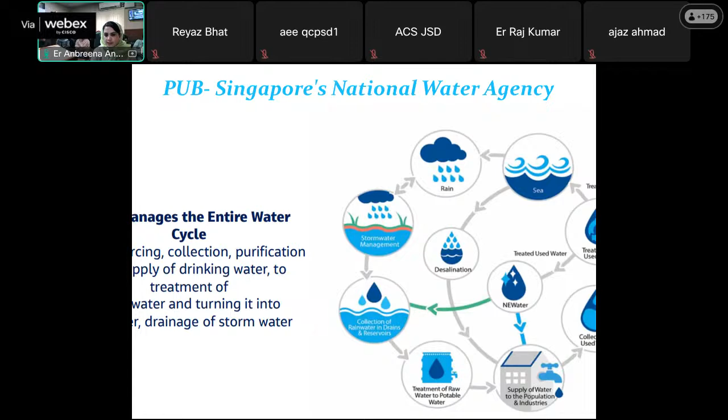Singapore's approach to water sustainability has been through hard work and coordinated efforts. They have managed to construct not only a robust but a diversified supply of water to meet the ever-increasing rising demands. Advanced planning, design, and construction of water supply systems, be it drainage, be it pipe jacking, micro tunneling, all the modern technologies are being adopted for any site or construction of water supply systems.

PPP framework projects have been introduced in Singapore in various water projects, wherein public and private partnership has been encouraged. The expertise of the private partners, along with financing and operational expertise, complemented with the responsibility of the public as a stakeholder, provides access to safe drinking water and wastewater management.

The distribution network loss of water is being managed very meticulously through accurate metering, proactive leak detection, and network management. The approach of Singapore is predictive rather than reactive, because they act in a manner so that they predict and apprehend any losses in the distribution, such that proactive measures are taken.

These losses are prevented. The legislation and rules in Singapore with regard to water supply are quite stringent. As much as $50,000 fine is charged to any person or contractor involved in damaging any water supply infrastructure or pipe damage, along with a jail term of 3 years. At present, a Singapore dollar is equal to 61 Indian rupees.

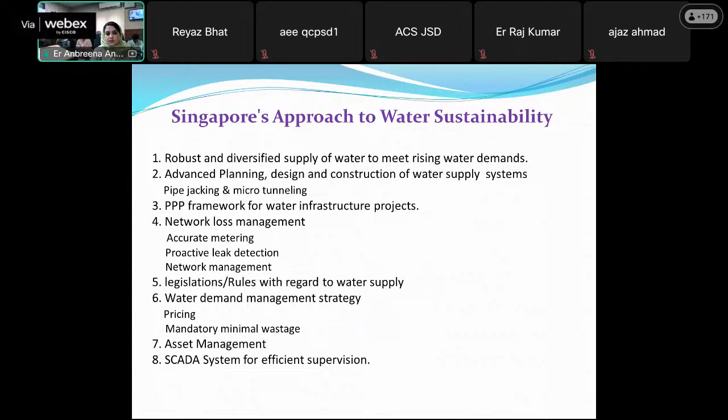Asset management is being done for all assets, whether it be water treatment plants, water reclamation plants, or pipe networks. Asset management is actively done, and a SCADA system is installed in every plant for efficient supervision.

Network distribution management is done through good planning and design, which involves sizing of pipes, location of valves, and alternate supplies. During construction, there is strict supervision, control, and workmanship. There is use of reliable pipe material, including PU coating, which is polyurethane coating, done on DI pipes for all replacement projects. Application of wrapping material is done for corrosion prevention, along with good quality, corrosion resistant connections.

Pipes are cement lined DI steel pipes, and mains greater than 700 mm diameter are cement lined steel pipes. Every precaution in planning, design, and construction phases is done meticulously to ensure minimal wastage of water and better efficiency.

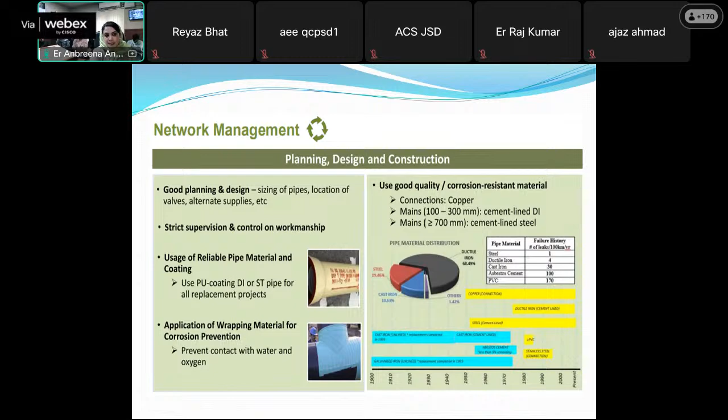There's a proactive leak detection mechanism in place for distribution mains less than 500 mm. Noise loggers, correlators, mobile phone sensors, and permanent leak detection sensors are there for monitoring any leakage on a daily basis.

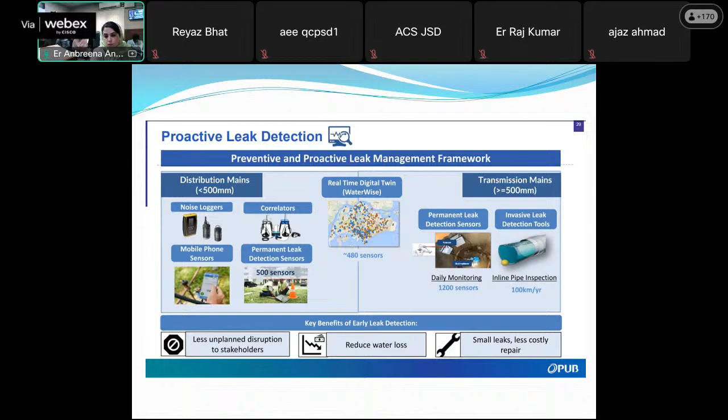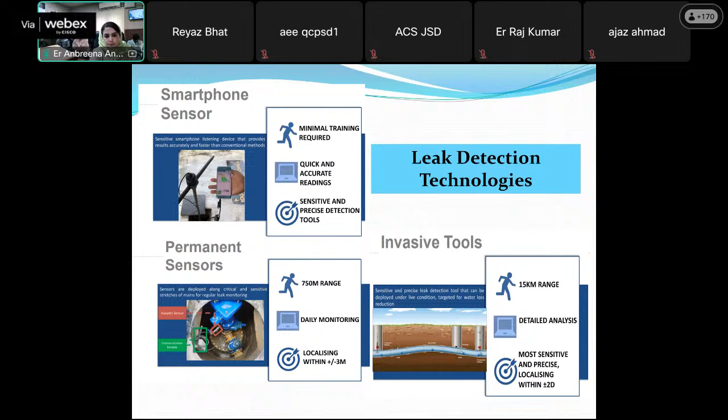Permanent sensors are installed in every transmission main. There are also invasive technologies where, under live conditions, a precise leak detection tool can be employed targeted for any water loss, with a range of 15 kilometers. Such are the active, proactive things being done.

This is the Johore River Water Works. The water is being imported from Malaysia, the adjacent country to Singapore. Singapore was part of Malaysia at one point of time, and at present Singapore still manages its water supply partly by importing water from Malaysia.

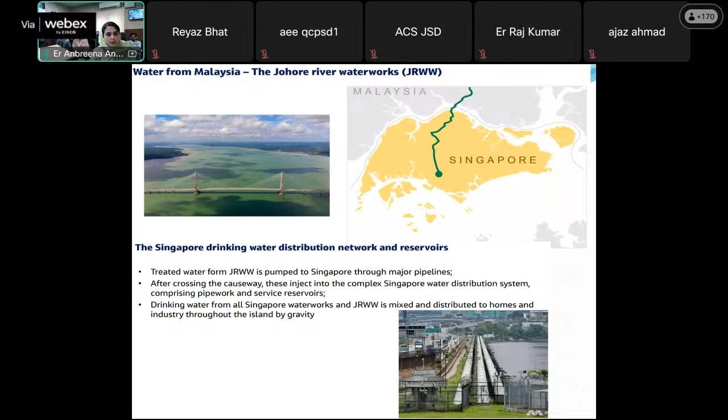The treated water from the Johore River Water Works is pumped to Singapore through major pipelines. These are injected into the complex Singapore water distribution system and distributed to homes and industry across the island by gravity. As seen in the pictures, the Johore River Water Works pipeline crosses the causeway and is then distributed inside the country.

Then we come to the NEWater production. In Singapore, the terminology has been altogether changed. In India, we call this water used water or reclaimed water, but in Singapore, they called it NEWater production, after this treated used water.

From this plant, which is called water reclamation plant in Singapore, it undergoes a series of advanced recycling techniques like microfiltration, ultrafiltration, and reverse osmosis. Then finally ultraviolet disinfection is done, and new water is produced, which is very good, safe, completely safe, and declared as per WHO standards. It is fit for potable drinking water.

People in Singapore have greatly adopted this new water, using it for every purpose. It has been marketed on a great scale, because of motivation and public awareness programs, and people have greatly adapted it.

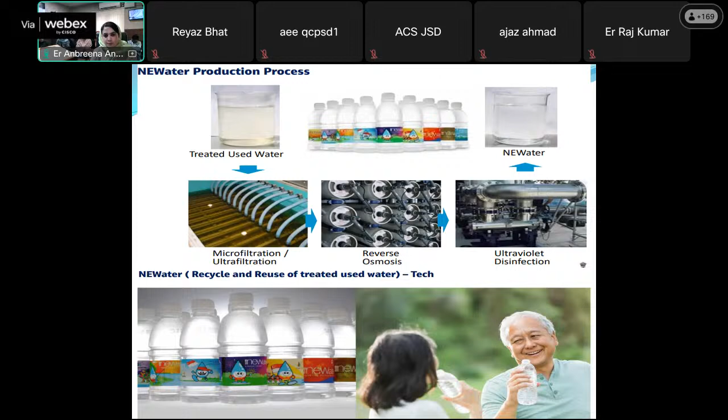These are the series of processes which this used water undergoes, after being treated from any sewage treatment plant, called water reclamation plant in Singapore. After primary and secondary treatment, this used water undergoes microfiltration, wherein it is passed through a 0.2 micron filter and suspended solids are filtered out. This water is conducted through hollow fibers, and any impurity up to 0.2 microns gets attached to these fibers.

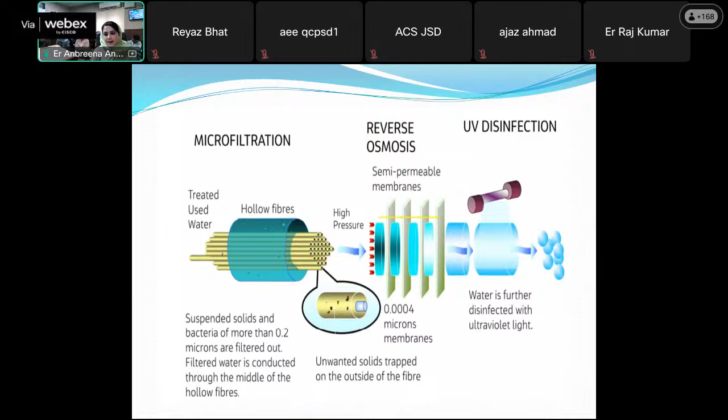Then it is subjected to reverse osmosis, wherein under high pressure, this water is passed through semi-permeable membranes, and particles as small as 0.0004 microns are removed and trapped in these membranes. Finally, the water undergoes UV disinfection through UV light, and it becomes fit for drinking purposes.

In Singapore, land is a constraint, as the country is very small with a total area of 734 square kilometers. The treatment technology becomes a difficult decision to choose because land is a constraint - you cannot construct large treatment plants and large reservoirs everywhere.

So a process strategy has been developed wherein the process is selected after undergoing various checks, like the capacity of the plant is one parameter, and the second is the availability of land. If capacity of the plant is greater than 50 MLD and land is available, then you can go for conventional treatment through primary clarification, secondary conventional biological nutrient removal, then biosolid treatment, and finally deammonification.

But if capacity of the plant is greater than 50 MLD and land is not available for construction, then you adopt process number 2. Here, we replace conventional secondary treatment with MBR technology provided with IFAS, integrated fixed film activated sludge technology, which reduces the space because secondary clarification is done in a single tank only, so sludge generation takes place quickly, and we don't require huge clarifiers for sludge digestion.

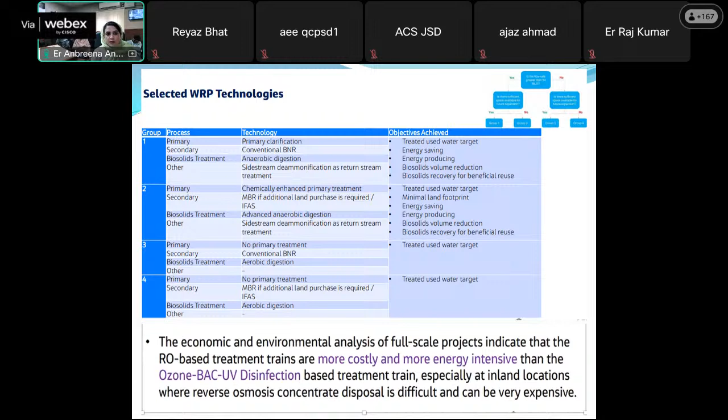For advanced recycle technology, where water is converted into potable water, it has been found that RO-based treatment trains are more costly and more energy intensive compared to ozone bioactivated carbon UV disinfection, especially at inland locations where reverse osmosis concentrate disposal is difficult and can be very expensive. This is how selection of technologies is done.

This schematic diagram shows the 4 treatment processes as discussed. In group 1, we have conventional technology used in sewage treatment or water reclamation, followed by advanced recycling water treatment. In group 2, where there is land constraint and capacity greater than 50 MLD, we use bioreactors with MBR technology, followed by the same advanced recycled water treatment plant. Then treatment processes 3 and 4, where after primary, secondary, and tertiary treatment, the recycled water is produced.

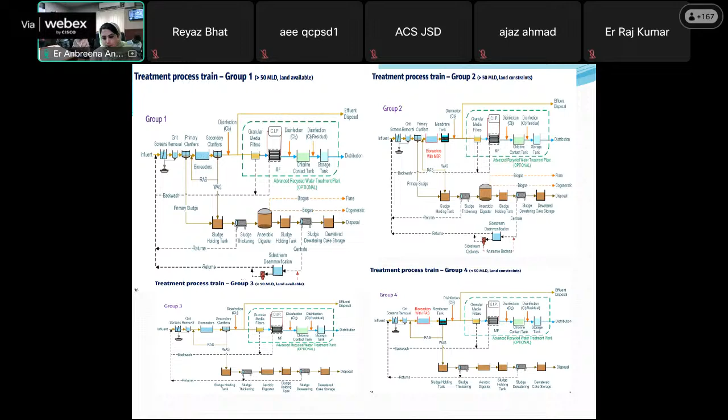This is an overview of the construction of conveyance systems, any wastewater treatment pipeline or any water system pipeline transmission mains.

Trenchless technologies like pipe jacking or micro tunneling are being adopted against open cut excavation, because in Singapore land is a constraint and not much working space is available for these constructions. These technologies are typically faster, but higher in cost, with less disturbance and less carbon footprint on the environment since less space is required. However, the ground condition may require stability, which is achieved through certain grouting techniques, and there are many others as well.

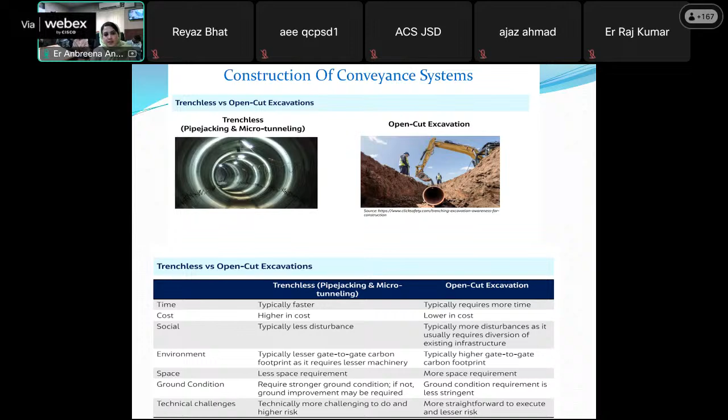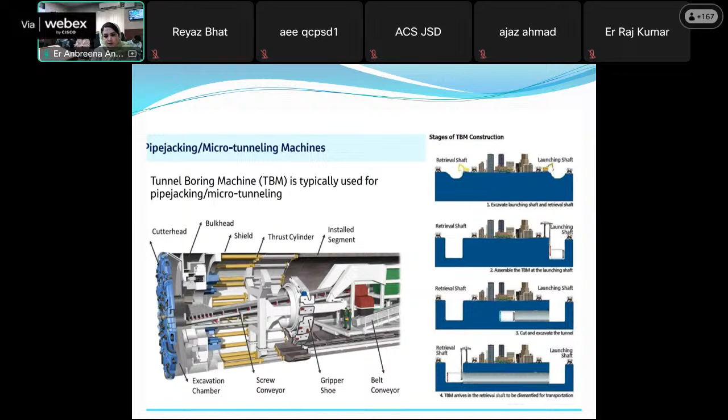This is a typical pipe jacking or tunnel boring machine, used for pipe jacking or micro tunneling. The stages are: wherever there is a construction site, you construct a launching shaft and a retrieval shaft. The TBM is transported to the site in disassembled form, assembled at the site itself, and launched inside the launching shaft. Then excavation of the tunnel is done, and the TBM is retrieved at the retrieval shaft and transported back.

This is the drainage scenario of Singapore. As I already said, Singapore receives a rainfall of more than 2200 mm per year, which is double that of London. So Singapore operates separate systems for drainage as well as sewers, and rain is conveyed to the sea to prevent flooding, as Singapore has various space constraints.

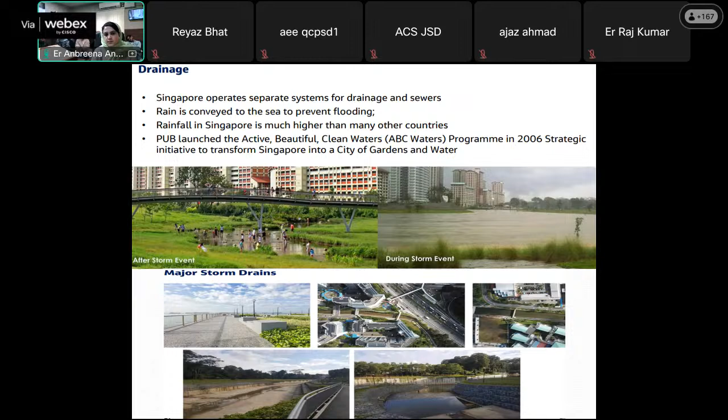From the pictures, we can see that major stormwater infrastructure has been constructed in Singapore, and certain flood detention buffers have also been built. During a storm event, this area acts as a buffer, and once the storm event is over, the same area acts as a beautiful garden or green space with water, where people can go for recreational activities. So PUB, the single water agency in Singapore, launched the Active Beautiful Clean Waters program in 2006, with an initiative to transform Singapore into a city of gardens and water.

This was the problem with the construction of a sewerage system in the past, because land is a constraint in Singapore. To eliminate any excessive land usage, the deep tunnel sewerage system concept was developed. This helped eliminate the need for any intermediate pumping stations in between, and the whole of the sewage or stormwater drainage could be transferred through gravity into a single compact water reclamation plant, where it was either treated or the effluent was simply disposed of into the seawater.

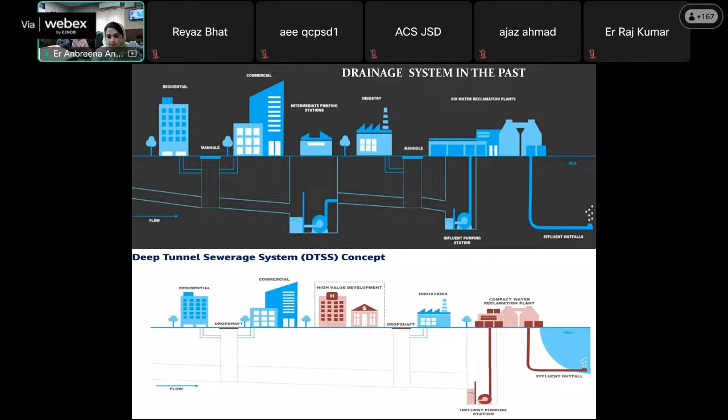Now in India, looking at the water recycle status in 2021, the total volume of used water generated by households in India was around 72,368 MLD. Out of this, the estimated infrastructure capacity for treating used water in India is only around 31,841 MLD. As per the inventory of the Central Pollution Control Board, only a small portion of treated used water is being reused in India.

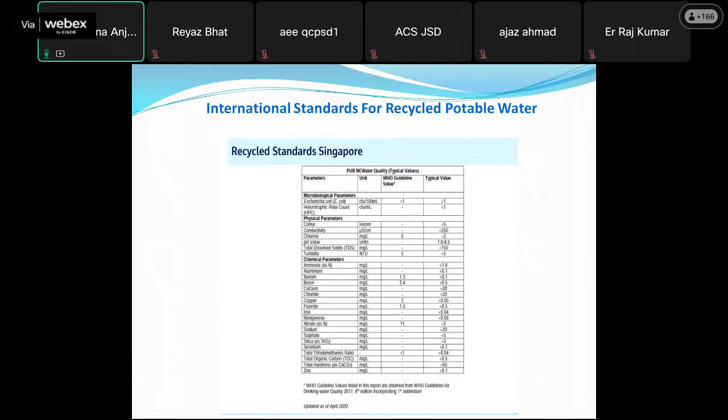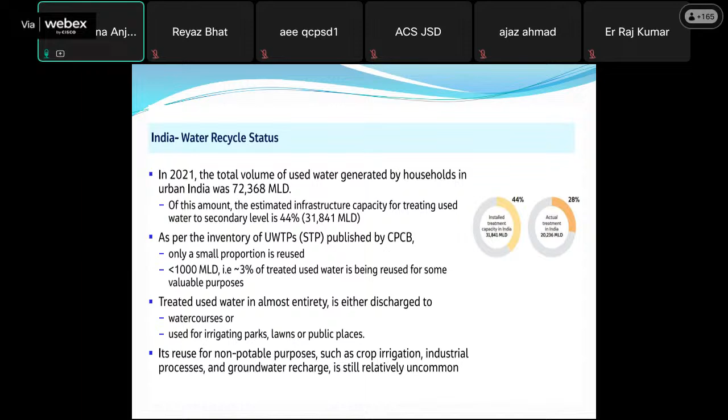That is less than 1,000 mLDs, or 3% of the treated used water being reused for any valuable purpose. This treated water is almost entirely discharged into water courses, irrigation parks, lawns, or public places. It is reused for non-potable purposes such as crop irrigation and industrial processes, but such reuse is still relatively uncommon.

Globally, India is ranked as the 13th most water-stressed country. Water scarcity necessitates diversification to alternative water supplies. After Qatar, Israel, Lebanon, Iran, Jordan, Libya, Kuwait - all Gulf countries - Saudi Arabia and UAE, India ranks at number 13.

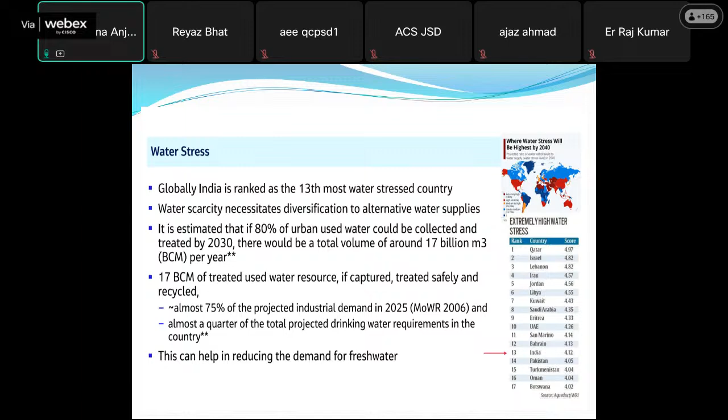It is estimated that if 80% of the urban used water could be collected and treated by 2030, there will be a total volume of 17 billion cubic meters per year. Out of this 17 billion cubic meters, if captured and treated safely, almost 75% of the projected industrial demand can be met, and almost a quarter of the total projected drinking water requirements in the country can be met, helping reduce the demand for fresh water.

These are certain central laws and policies governing water sanitation and used water in India. The Water (Prevention and Control of Pollution) Act was enacted in 1974 to maintain and restore the wholesomeness of aquatic resources.

Then the Ganga Action Plan was launched in 1986, followed by the Environment Protection Act of 1986, which is umbrella legislation designed to provide a framework for central and state government coordination. This act applies in principle to every establishment, agency, or individual discharging any pollutant into the environment.

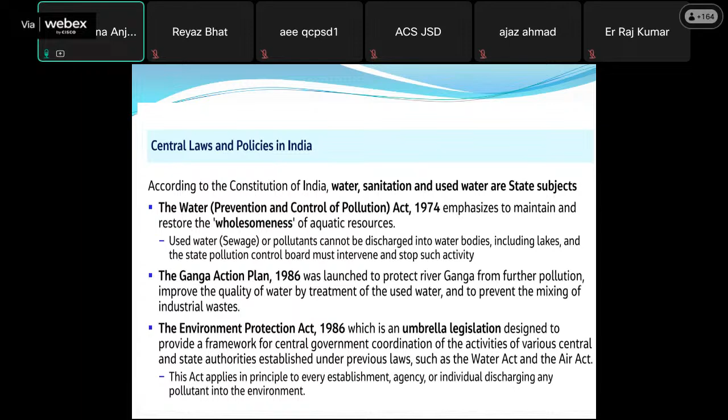This is the scenario of state policies on treated used water. Twelve states in India, including our state of Jammu and Kashmir, have a safe reuse of treated water policy, either approved or at an advanced stage of drafting, including Karnataka, Chhattisgarh, Tamil Nadu, UP, Maharashtra, and West Bengal. Majority of state policies prescribe mandatory usage of treated water within a certain distance from a used water treatment plant, so that it is not disposed of directly into water bodies.

ULBs have set targets ranging from 20 to 25% of treated used water replacing fresh water usage in India in the initial years. For some states, the target varies by size; states like Gujarat and Haryana prescribe higher targets in subsequent years to achieve 100% reuse by 2030, and Karnataka prescribes 50% reuse by 2030. These quality standards in the state policies are limited to CPCB and state pollution control discharge standards.

Sir, today I am going to present the filtration plant, oblique filtration gallery.

Myself, Executive Engineer Ashok Kumar Sharma, present in Udhampur Division. Sir, today I am going to present about the filtration gallery, oblique filtration plant, which we have designed after taking a lot of challenges from the field, particularly the field.

Sir, let me explain that Udhampur district, as we all know, is mostly hilly areas. On the whole, we have 159 schemes. When we talk of the filtration plants, we have 38 rapid sand filtration plants and 214 slow sand filtration plants, which will remain the major challenge for this division in regard to tendering and execution of the same.

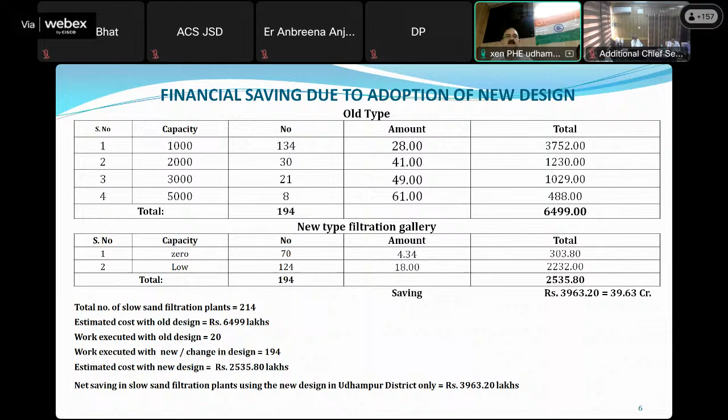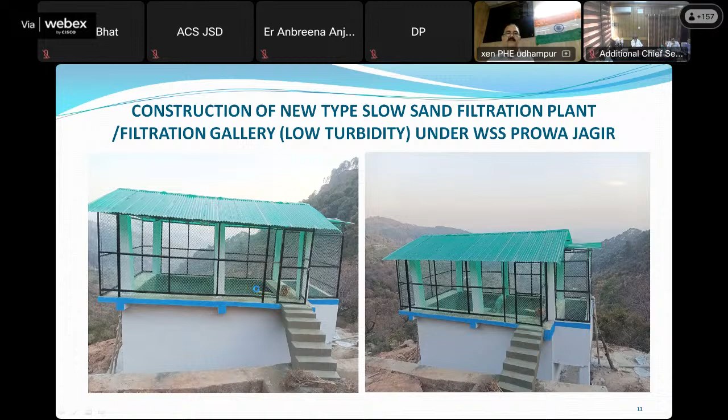Sir, any question from any side? Any my counterparts? Riaz, are there any questions from anybody? Sir, I don't think so, sir.

All right. It seems that we'll have to change the time of holding this particular thing to Thursday, where we have more energetic participation from everybody. We can think of keeping it on Thursday, 4 o'clock, so that Saturday everybody seems to be in a rush to enjoy the Sundays.

In any case, Ashok, very good presentation. You have brought out some very important aspects. What is specifically something that I wish to point out here is that while it is easy to have a challenge and then get stuck with fixed ideas, here there was an effort made to try to get to the bottom of things, understand why nobody is coming in tenders.

Why is it? Is it something which is critical to whatever our objective is? The objective is to give clean water. So if the land is not available, is it possible to make something in less amount of land? For example, even if it was turbid water, would it have been possible to have a split kind of filtration system which uses the available terraces?

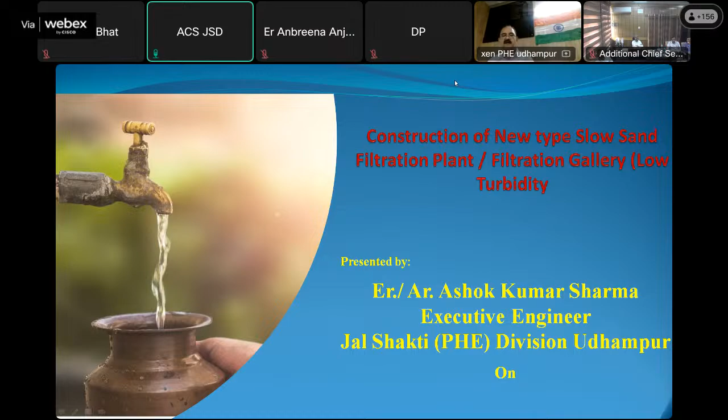Thank you, sir. Ashok Sharma. Yes, sir, I'd like to say something, sir. Yeah, Mr. Kakru, please go ahead.

Sir, I just wanted to say something about the slow sand filtration plants, because I joined a little late, but somehow I got the hang of what he's trying to say. One of the main problems is that the filter media gets spoiled very easily, and filter media being very expensive, we reach a stage where the filtration plant itself gets defunct.

So one of the things the department probably needs to do is develop a standard operating procedure for operation of these filtration plants. Like in hydropower plants, when the water has high turbidity post rains, they generally bypass it - they do not let the water flow into the channels so that the turbines don't get damaged. In a similar manner, we can think of something. This is just a wild thought, but during high turbidity times we can try to bypass the filter beds so that they do not get choked very easily.

And in that case, how do we supply water to the people is something that has to be thought about.

Let me interrupt you here. The times of very high turbidity in case of flash floods, etc., are not for an entire day - it is for a period of 2 to 3 hours, a limited period of time. It is possible that after that, or if sedimentation tanks are not sufficient, there may be alternative ways that are possible. So in fact, this idea is something you need to develop further.

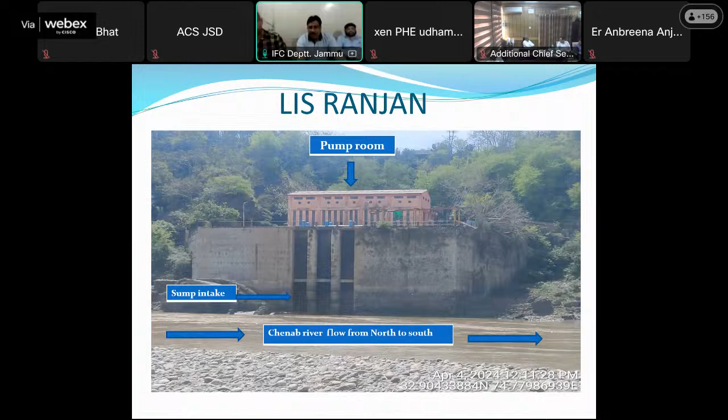A brief history about the river Chenab and why the desilting is occurring, with the water level, the turbidity, and the discharge. There is major variation in all three cases in river Chenab because the water level in the lean season starts rising from 8 feet to 35 feet. Similarly, the turbidity, which is around 8 to 18 NTU units, goes up to 2000 during the peak rainy season. Similarly, the discharge varies from 3000 cusecs to 2.5 lakh cusecs. So there are big changes.

So accordingly, silt accumulation is a regular part of these lift irrigation stations.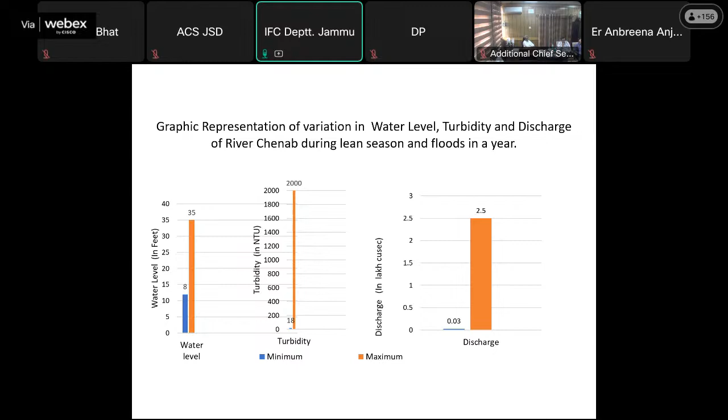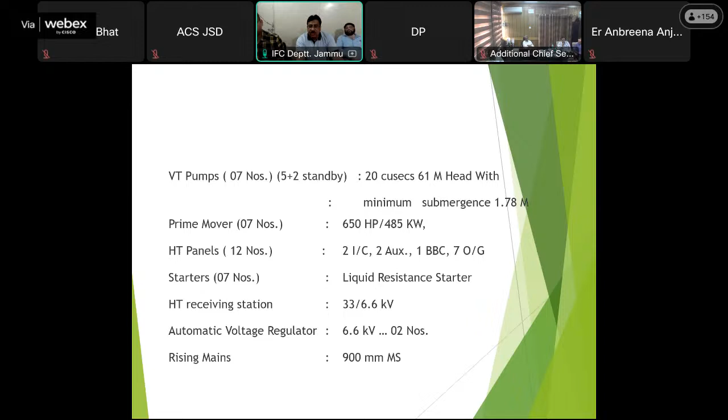Next, a brief look at what exactly we do at Ranjan. It has 20 cusecs, 7 pumps, 5 running and 2 on standby, and at one time we run 5 pumps. The only problem we face is that the minimum submergence of every pump is 1.78 meters, and it should be maintained so that cavitation, water hammering effects, and other things are avoided during pumping operation.

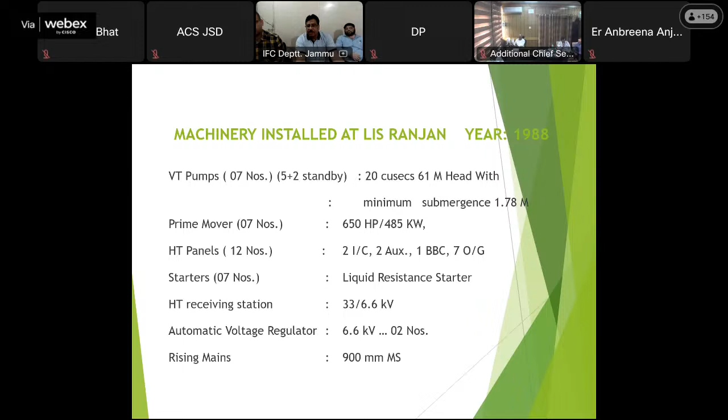These are 7 pumps which are lowered at any particular time, but we are running only 5 pumps and 2 are kept as standby, as I already explained.

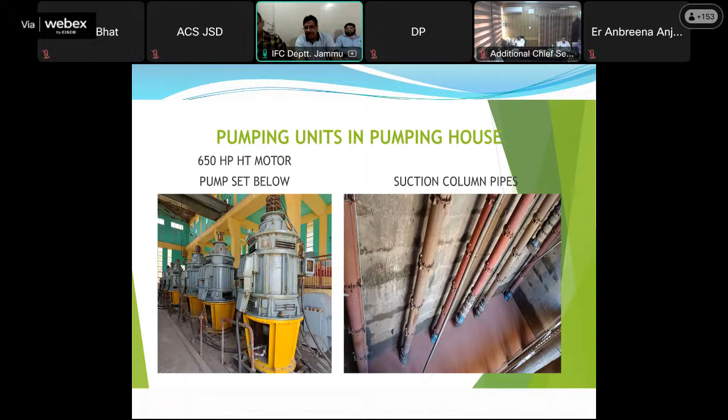This is the basic structure of the sump, from where on the left side the water enters from the river Chenab and goes inside the sump tank, and these pumps are situated inside the chamber.

The photograph shows the complete desilting. It is during the complete desilting time that the sump is absolutely filled with silt.

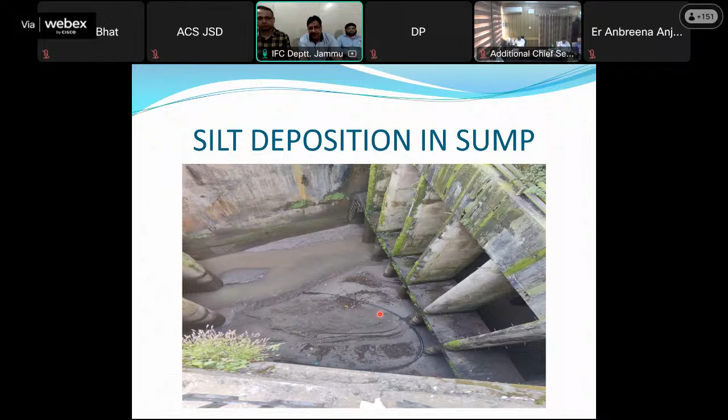These are photographs showing that these pumps, which have to lift water up to 61 meters head, are totally embedded in the silt, and the design ensures that we should have at least 1.78 meters of clear water available at their bell mouths.

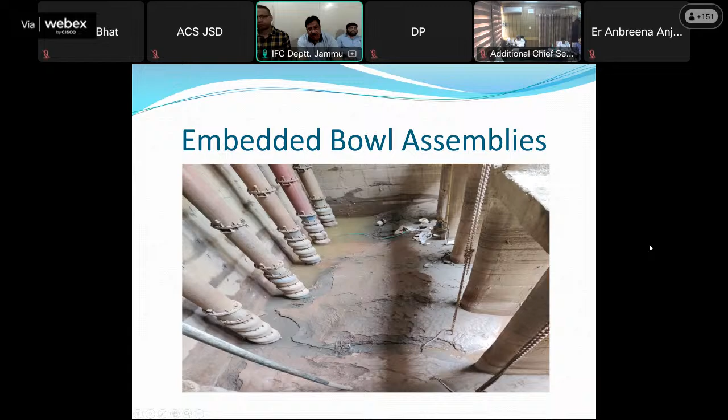Now these were the reasons of silt deposition at the LIS Ranjan. There was huge variation in turbidity, as I already explained. The flood always brings silt with it.

The silt ejection at all the run-of-the-river hydroelectric projects, especially the Salal, is a regular phenomenon, and they often release this silt at any point of time in a day. The gates cannot be closed during minor and average floods due to the demand of farmers, which is at peak because during the paddy season, it is a coincidence that the rainy season also coincides with the paddy season.

So the coming of silt cannot be fully avoided in the sump. The silt cannot be removed from the sump in Ranjan except in the months of January and February when the water level is the leanest. Because when the water level goes below 8 feet in the river channel, only then can we go into the sump tank and remove the silt manually.

Another problem we always face is that since it is only a one-time exercise in a year, there is solidification of the silt for the whole year, and we even need power hammers to break the silt before removing it.

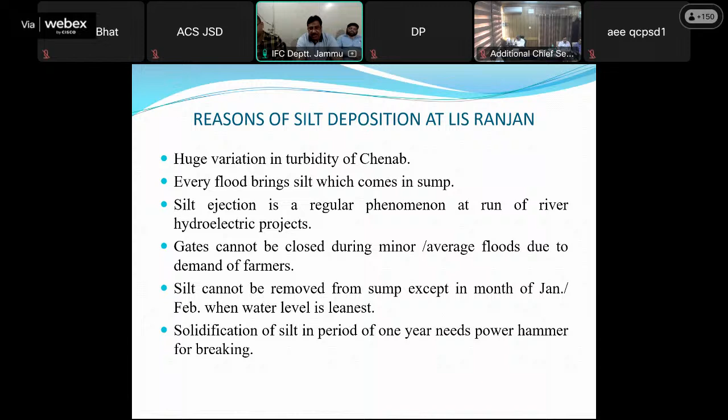Now, what exactly are the losses to us in terms of machinery? The impellers and mouths of bowl assemblies, as I showed in the previous picture, generally get embedded in the silt. The water column is less, submergence is reduced, and cavitation occurs.

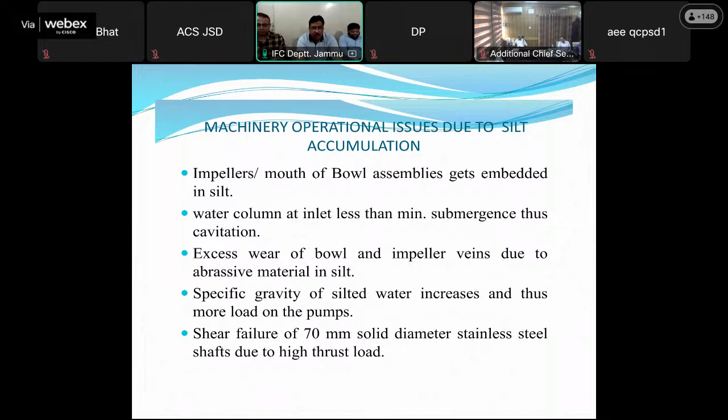There is excess wear of bowl and impeller vanes due to abrasive material in the silt. The specific gravity of the silt water increases, causing more thrust load on the pumps. This often leads to shear failure of the 70mm diameter stainless steel shafts due to this thrust load, and there is occasional breakdown due to silt accumulation in the sump tank.

This is another picture showing the total area of the sump tank, and it concludes that around 1200 square meters is the area of the sump tank, and the silt accumulation varies from 2 meters to 3.30 meters at any point at any place. So the overall storage of the accumulated silt is around 1200 meter cube.

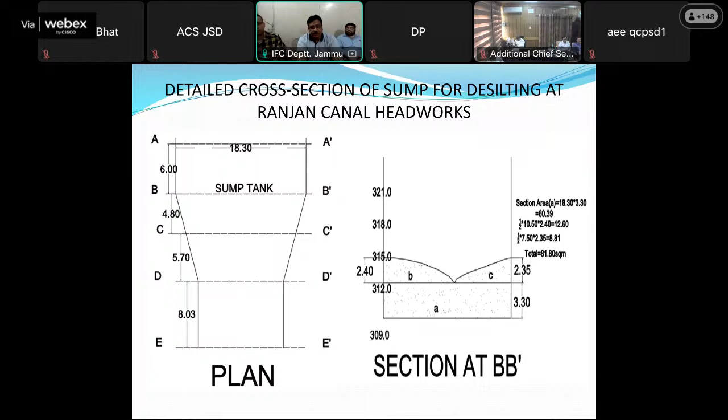This picture shows that before removing the silt manually, we have to engage an earthen bund, or ring bund, or muthu bund, through which we start 2 layers of cemented bags. This is done by our civil counterparts and is a very difficult exercise. Earth filling is done between the 2 cemented structures, using around 187.5 cubic meters of material brought from outside and packed in cemented bags, laid on the banks of the river before starting the manual desilting operation.

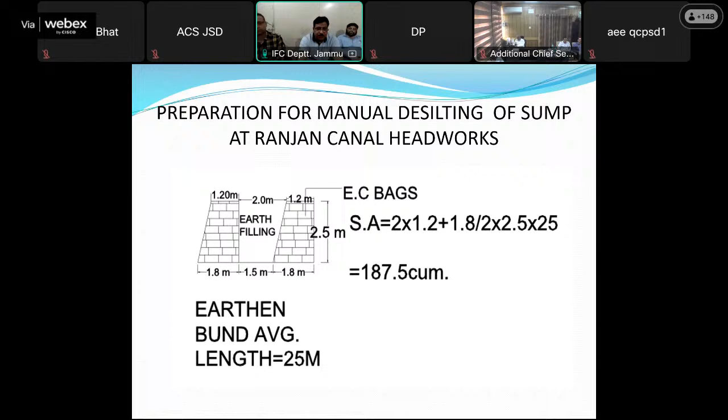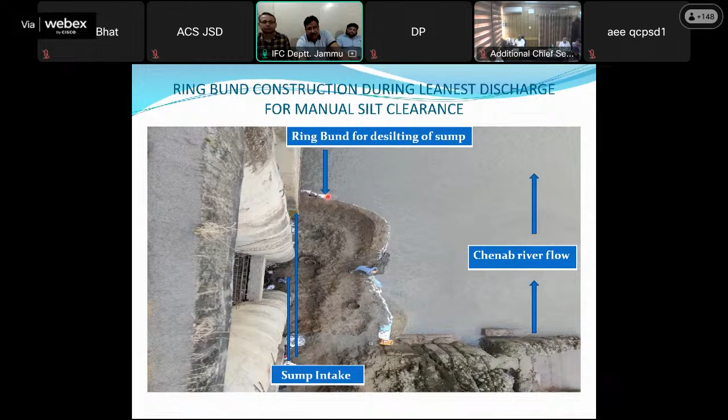This figure completely shows the total length of 25 meters of the silt bund, this ring bund, with other dimensions already explained in the previous slide. The water has to be closed from entering the silt tank, the sump tank, before we start the desilting operation.

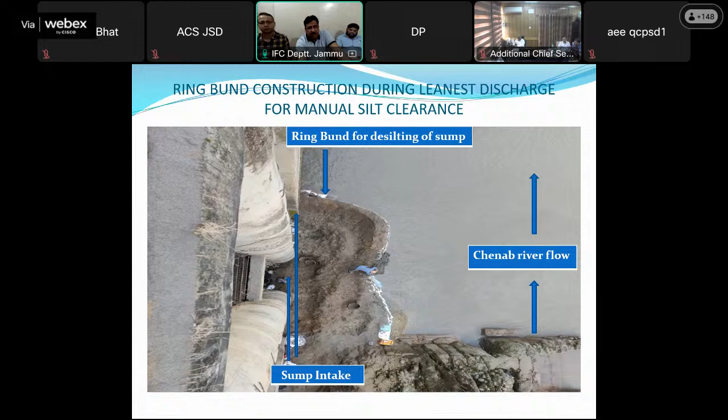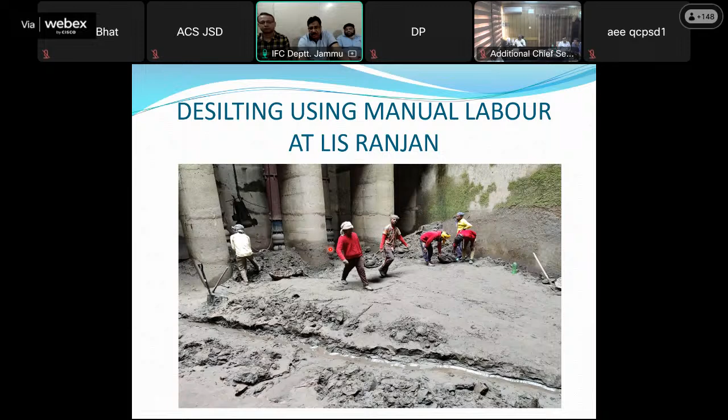These are some photographs showing how people were manually engaged in clearing the bowl assemblies of the various pumps to make them fit for the next season. These other pictures show the volume of silt and the removal exercise, which is a major cause of concern.

Now, what exactly is the way forward? How to remove this? This was the planned operation to remove all the problems which we highlighted in the previous slides.

Through this particular pump, we wanted to make continuous removal of silt by placing this slurry pump inside the sump tank. To achieve this, we finalized an arrangement with a 15 meter head, 10.8 kilowatt motor with a shutoff of 24 meters, and a maximum discharge of 3.25 cubic meters per minute.

If this pump runs around the clock to remove the silt, it may complete the total process in about 15 to 20 days. This pump can be used at any point of time without waiting for the leaner season, ensuring that wherever we find silt, or due to any type of flood, it can be made operational immediately.

Slurry pumps, although available in large numbers in the markets, faced several failures earlier due to the various metallurgical requirements needed for this particular job.

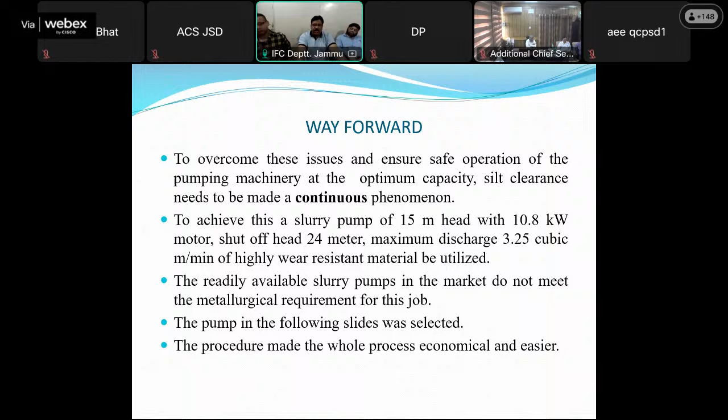To make this process a success, the thrust was on the metallurgy of the impeller as well as the shafts, so that excessive wear and tear should be avoided and the life of the pump should be much more. From discussions with various manufacturers of such pumps, we zeroed in on high chromium white cast iron impellers.

This is a special basic material, if we see it in the iron carbon diagram. Normal steels have only about 2% carbon content, but when we increase the carbon content, we move straight from 2% to 6.7% in cast iron materials. For white cast iron material, the basic carbon content starts from about 4 to 4.6%, up to 6.7%.

When we add high chromium in this case, it gives more endurability and more abrasion resistant character to the impeller. The Brinell hardness, which in normal gray cast iron impellers we were earlier using was around 300 Brinell hardness, increases to 600 Brinell hardness.

Besides this, the pump has an internal cooling arrangement, so whether it is fully dipped or partially dipped in the slurry, it hardly matters, and failure due to overheating is not possible.

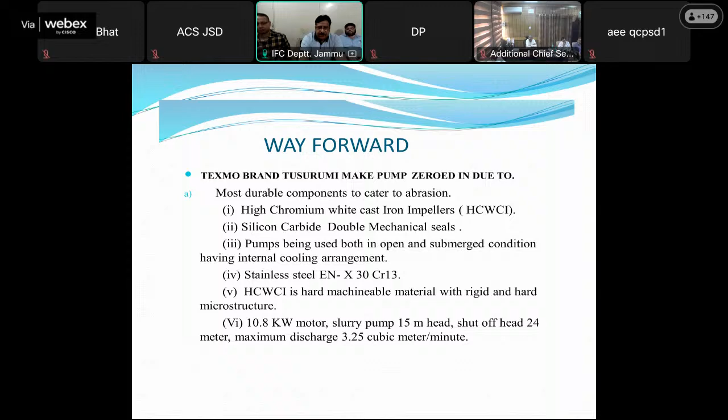This is basically the specification and photograph of the pump. It is made in Vietnam by the Tsurumi company, a Japanese company with a base in Vietnam, and this product was imported because in India, certain manufacturers were doing the casting part, but the machining of such hard material, which requires special tools of boron nitride, was not possible, as manufacturers like Kirloskar, KSV and Mather and Platt did not have such arrangements.

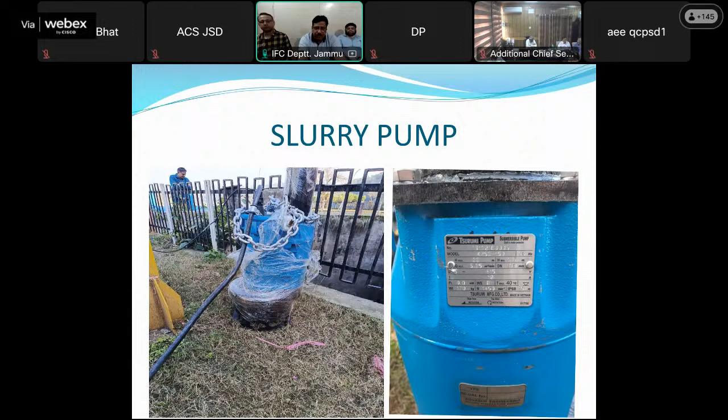But the movement we required was across the whole sump area, around 1,000 square meters. So initially we tried to do it manually by putting ropes on it, because the weight of this pump was not more than 170 kgs. In future, after the success of this operation, we are thinking of placing a crane with three-dimensional movement on top of the sump, so that wherever silt accumulates, we can immediately position the pump at that spot to remove it.

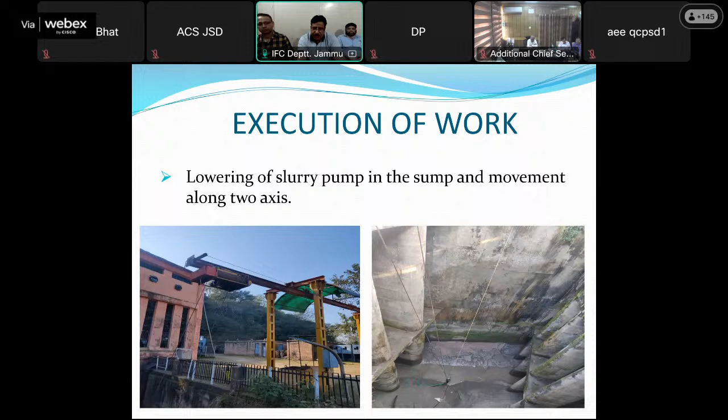This was the first operation when we started removing water from the major sump to the Chenab River outside, below the sump tank. But the problem we faced was that the pump was not able to lift the silt, because the silt had already deposited and the internal strainer was not able to break this silt into slurry.

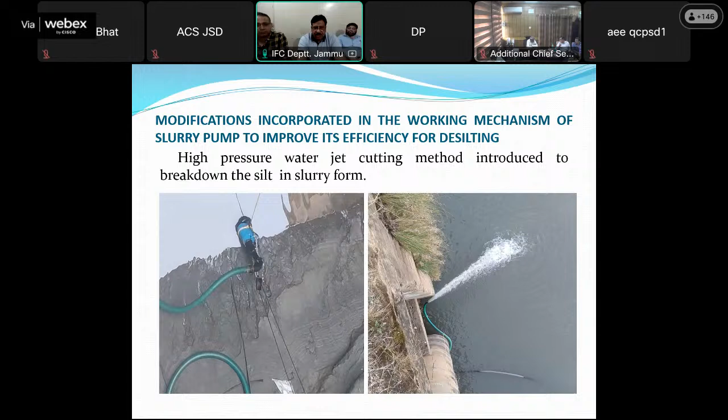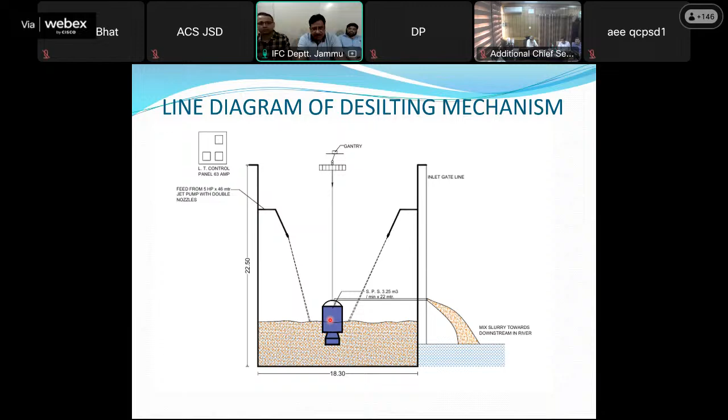So this arrangement was made by us at the site. Another jet pump was introduced, and from there two special jets were thrown on the silt to ensure slurry was formed, so the pump could lift this slurry and discharge it downstream. This is the photograph of that jet pump which was placed to break the silt into slurry.

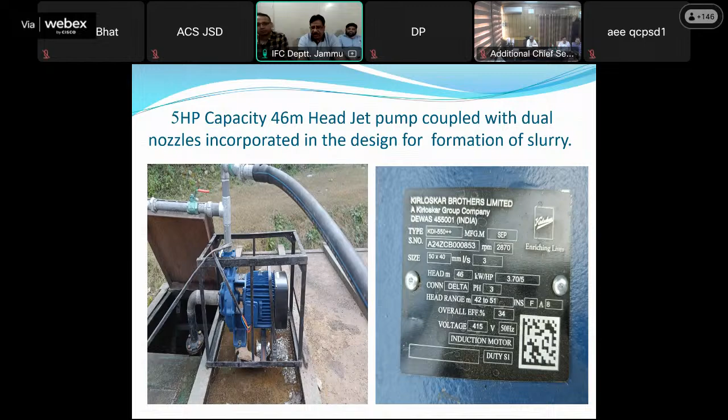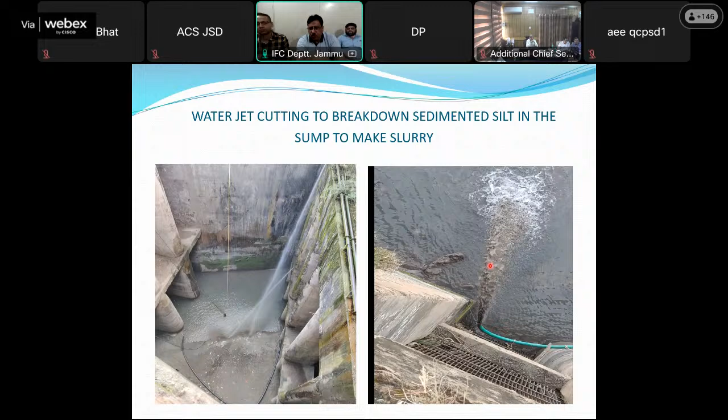When we pushed these jet pumps onto the internal silt, the slurry was prepared, and we can see from the other picture that the pump started throwing silt mixed with water in very heavy quantity, measured at around 2 cubic meters per minute.

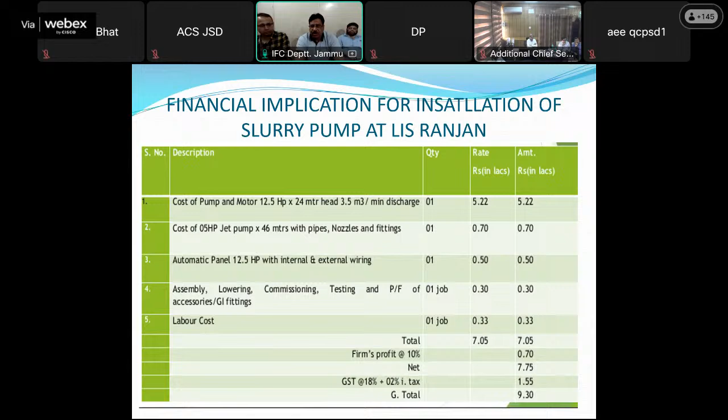But the life as projected by the manufacturer, based on various data provided, is that there will be only a 2% variation due to erosion on the impellers and other wear devices of the volute casing after about 600 hours of operation. We'll see next year when we start operating it whether this holds good or not.

So these are the basic benefits we have achieved. Now effective silt clearance from the sump can happen throughout the year. There will be manpower reduction, economy of operation by avoiding ring bund, and improvement in the operation of VT pumps and the life of their shafts.

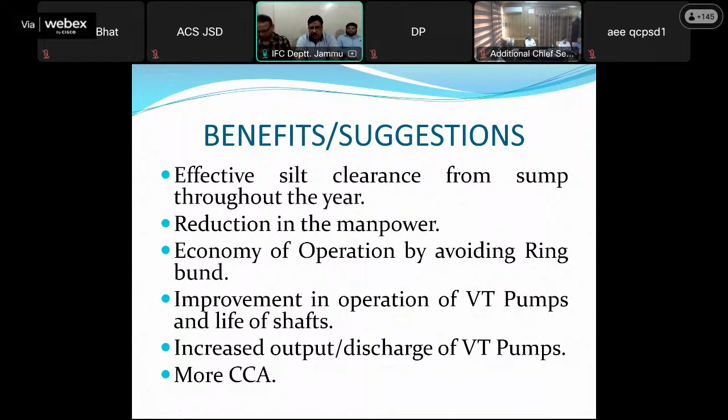Otherwise, these VT pumps would have to lift the silt along with water, since manual operation only starts in January or February. At other times, there was no option but for the existing VT pumps to lift silt along with water. Once this silt is no longer an issue, the total discharge of VT pumps will increase and more CCA will be covered.

I'll now display a video of this operation, which will give a clearer insight into what exactly we have described.

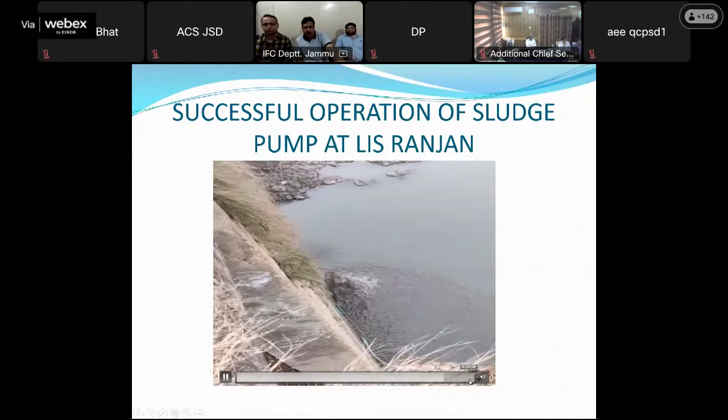Yes, would anybody like to comment? I presume the mechanical officers are also there. Would any one of them like to speak? Otherwise I'll start taking names to find out if people are there or not. Shahid, do you have anything to say?